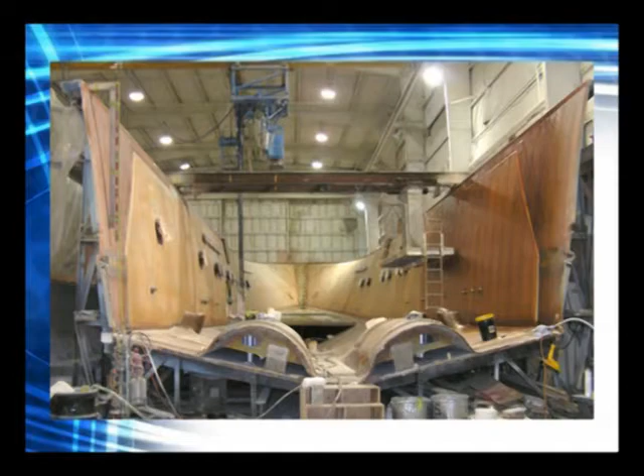Now we are looking at the size and dimension of a 130 hull mold, where the students will learn the machinery and the lamination processes for composites.

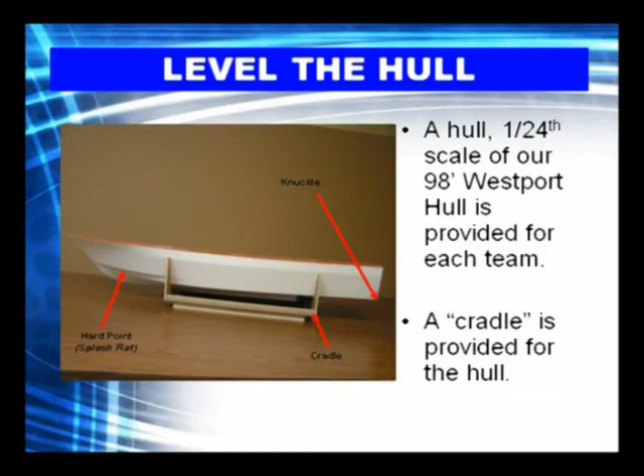Returning to the classroom after lunch at Westport Shipyard with a picture of how we will be leveling the hull, each team is given their hull and cradle for the first step in the process of leveling the hull.

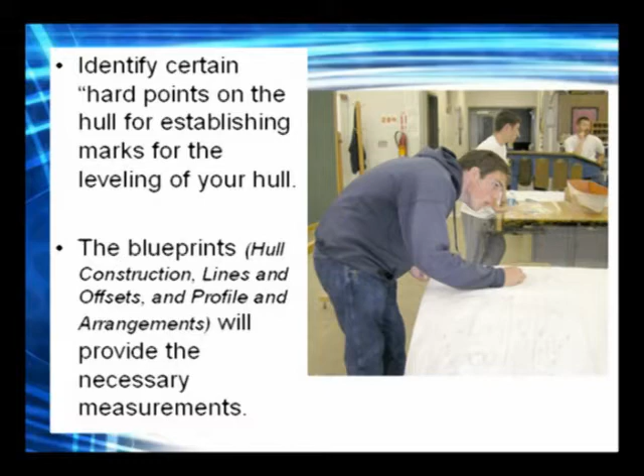Next, the teams are given a set of prints and start applying math principles and communication skill. At this point, you'll see the focus of the students in the process we'll use to complete our hulls.

Here you see students visualizing the importance of math principles to get measurements for the boat building principle. The hulls are measured from prints, and we start to see the importance of fractions in calculating the measurements.

It is important to verify the accuracy of each hull as being leveled quickly and accurately each day. Once leveling is complete and the center line is established, its accuracy is vital in patterning and installing parts correctly.

Learning terminology such as transom and sheer is critical in our daily communications process.

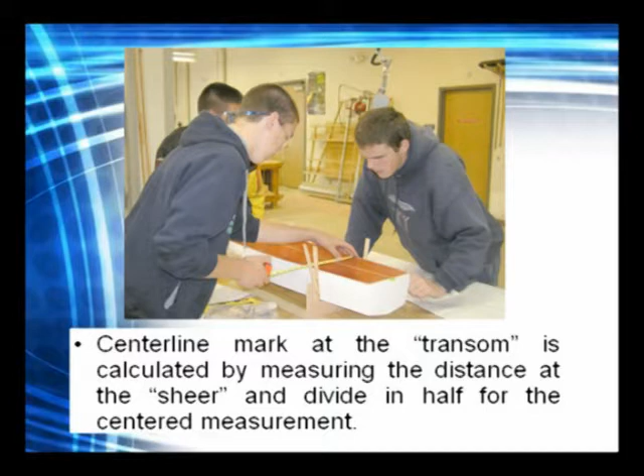It is important that each member understand the process as we rotate job duties each day. Communication is very important, whether verbal, written, or on drawings. Instructors must be clear and understandable throughout the training.

Participating instructors from the different schools represented provided students with oversight on their calculations in the process to find accurate measurements. Here the students are understanding the importance of what double check is in verifying correct placement of all parts.

Participating instructors help to verify each step before moving on. As in carpentry, we measure twice and cut once.

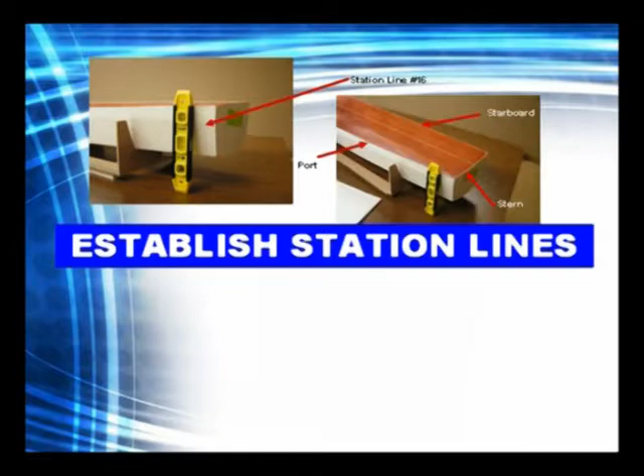Station lines are every 5 feet. Placement is critical when installing large parts. Each team's designer must communicate to the installer where each placement is.

Instructors help to clearly identify location and help with process explanations. Here the instructors need to know what they are explaining to the students.

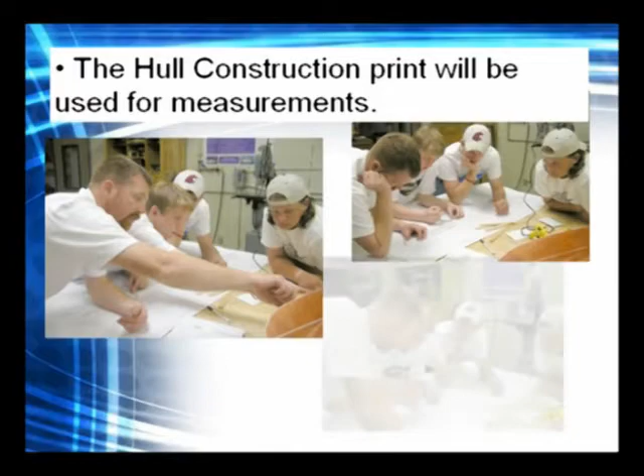A hard point is a point on the hull and is consistently found in the hull mold. The students must identify the hard points, then verify on the prints, and transfer them to the model.

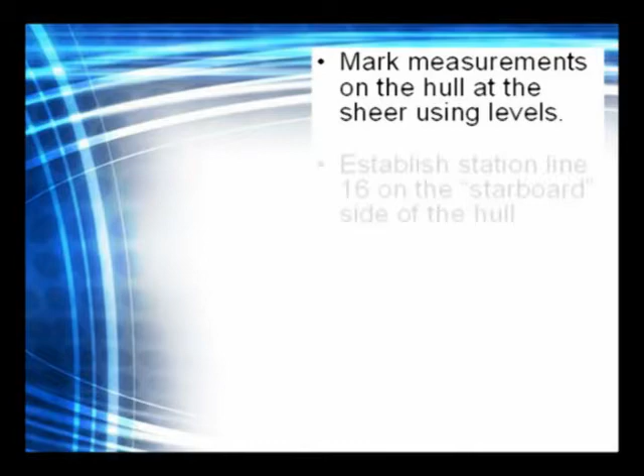Here students are working on triangulation measurements to find that they can quickly get close to the proper placement of station lines and learn the 3-4-5 rule to accurately place these marks critical in building the hulls.

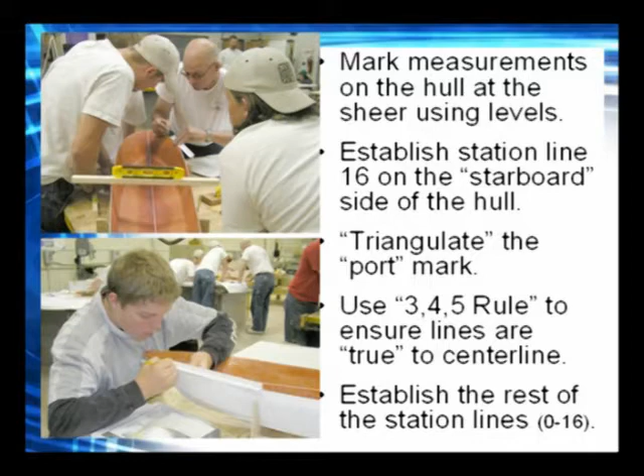Taking the mystery out of math, the students learn the 3-4-5 rule and learn to make it friendly. While some students understood the theorem, they had little or no practical application of it.

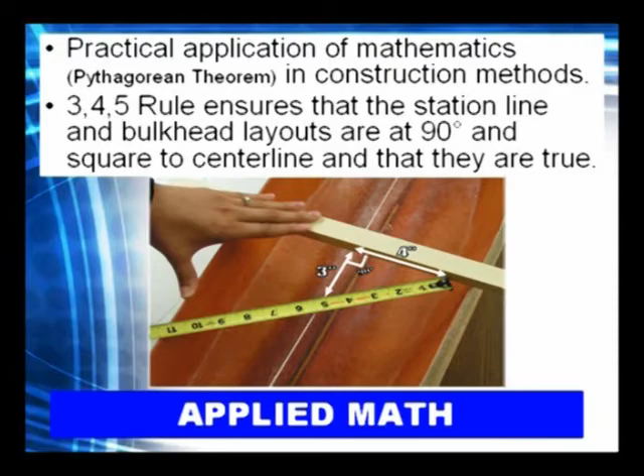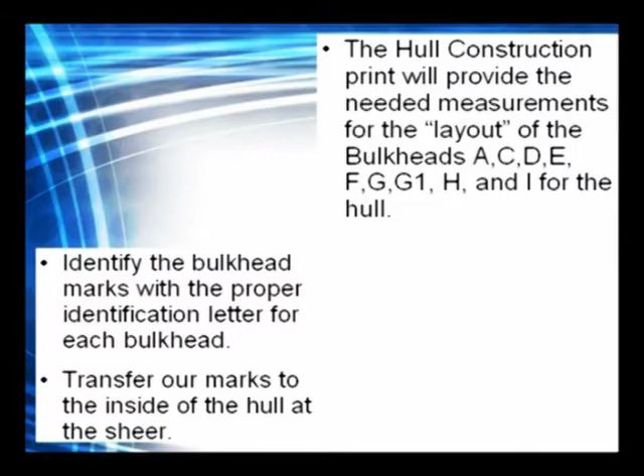At this point, the group is ready to establish the necessary bulkheads and learn to make patterns. The designer must again relay the information from print to mark out and identify the bulkheads on the hull sheer.

Terminology is very important. Students must know our tools and be certain they are accurate. Is a level level?

The students are learning correct patterning and scribing techniques for quick and accurate fits the very first time.

Prior to use of the hot melt glue gun, each team must discuss how to do it safely, as safety is number one.

With patterns completed, students can offer assistance to teams that haven't completed theirs, thus applying the overall principle of teamwork.

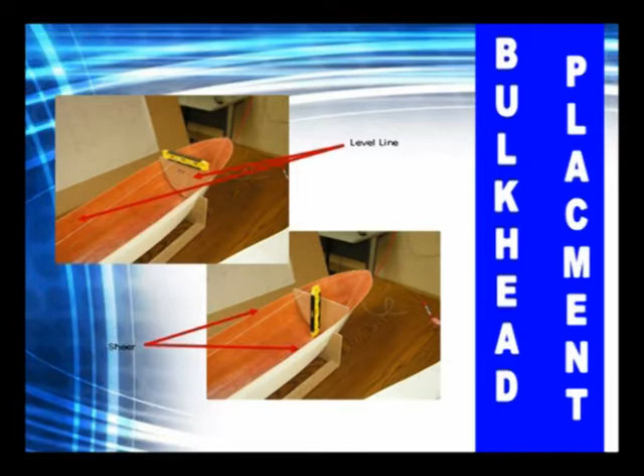Now with all the patterns complete by all the teams, the students are ready to make and install the bulkheads. The first step is to transfer patterns to plywood and mark each bulkhead with its letter for easy identification.

Once identified, they are ready to cut each bulkhead safely. The designer must verify the height of the bulkheads to prepare for deck placement.

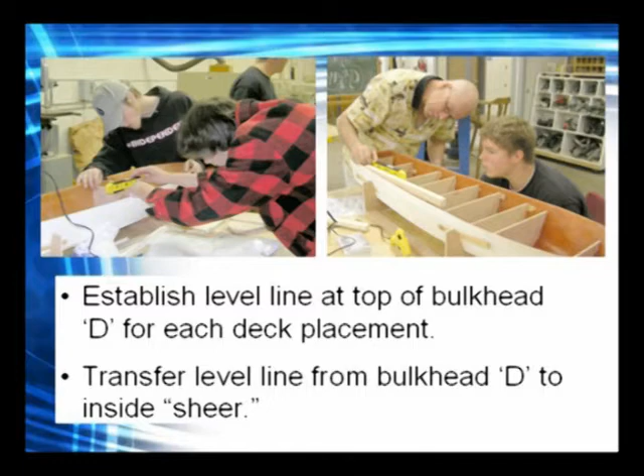The next step for students after cutting and tacking each bulkhead in its proper location is to use a straight edge to verify bulkhead heights.

Once verification of bulkhead placement is correct, the students level, plumb, and glue them in place.

With each team completing the bulkhead placements, we are ready to begin the final phase, the deck installation.

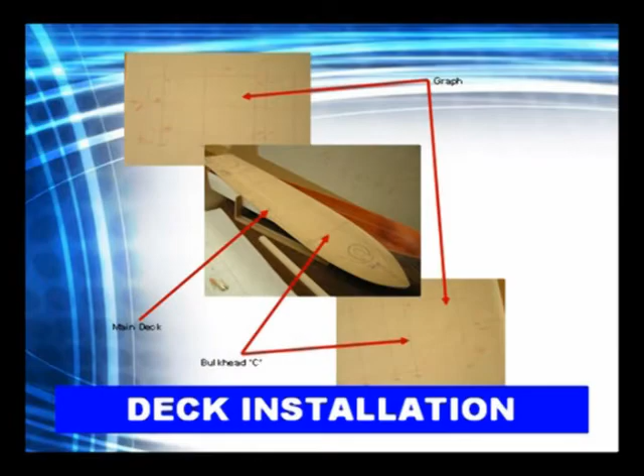Students learn to apply math techniques in graphing out a part, rather than just making patterns. Once the students understand the graphing process, they transfer the marks to the deck part to lay out and cut the deck for placement.

On the last day of class, the students have an opportunity to see a $45,000 machine used to glue the Westport decks in place. Students were also given time to ask questions of employees doing the jobs they just learned at summer camp.

The group ends the tour with a close-up of our Westport 130-foot motor yacht.

Certificates of interview were given to students who applied themselves well at the class.